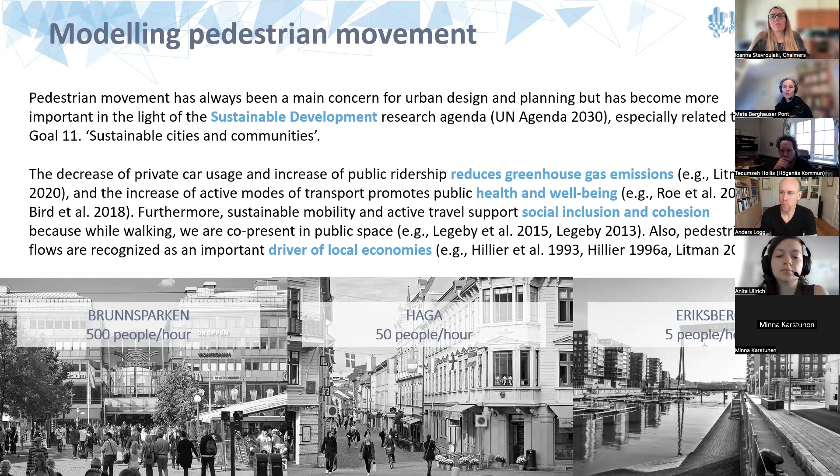So there are many reasons why it is important to not only understand the current situation, where people move and not move, and where you have high intensity of people co-present in the public space and where not, but it's also of high importance to be able to predict new situations. That's what we aim to do. So it's really going from describing to predicting these flows of people in cities.

What we do in this project is to combine two approaches. There is one model that Ioanna and I have been working on a lot, and a lot of other researchers all over the world, which is looking at pedestrian movement from a network perspective, the macroscopic models. On the city scale, you try to understand how the way the network is constituted and laid out affects pedestrian movement. There are also examples looking at pedestrian movement on a much more local scale, with different models, and we will use the social force model that Anita will talk about.

The innovation is not actually these two ways, where we have made a few steps forward in this project, but the combination of these two approaches is the innovation of this Milestone project. So what we aim to do is to predict pedestrian movement on the bigger scale so that we know which streets in the city have more pedestrians than others. Then we use that information to go to the local scale. It becomes an input variable for the local pedestrian predictions.

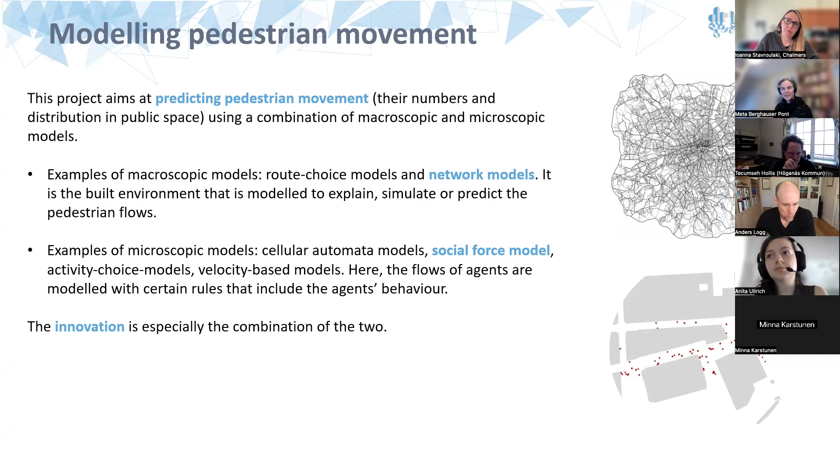Then we go over to a social force model and are able to predict the movement patterns in these local urban spaces. So that's the whole idea. We will present this to you step by step. And I will give the word to Ioanna to start with the city scale network model.

Yes, hello. So like we said, we start from the network model, which is the macroscopic modeling. The aim of that is to predict numbers of pedestrians for every street in a neighborhood or in the city. So how many people walk on each street.

But part of the aim is to do these predictions using spatial properties, spatial predictors that can be easily defined in the urban design and planning phases. And Meta will come back to that, because the point is that this modeling has to be useful to act upon the urban environment, to design, so to forecast pedestrian movement in situations that are planned, that we do not actually have; they're not existing situations necessarily.

And the model we use is a machine learning model, a lasso regression model, indeed to start from a big list of predictor variables, but actually identify the ones that are most strongly associated with the response variable. In our case, it's the pedestrian counts. So what we did is that we trained the model using data gathered in Stockholm, the whole metropolitan area of Stockholm, using different neighborhoods, suburban neighborhoods, urban neighborhoods, and so on. So these were our training data.

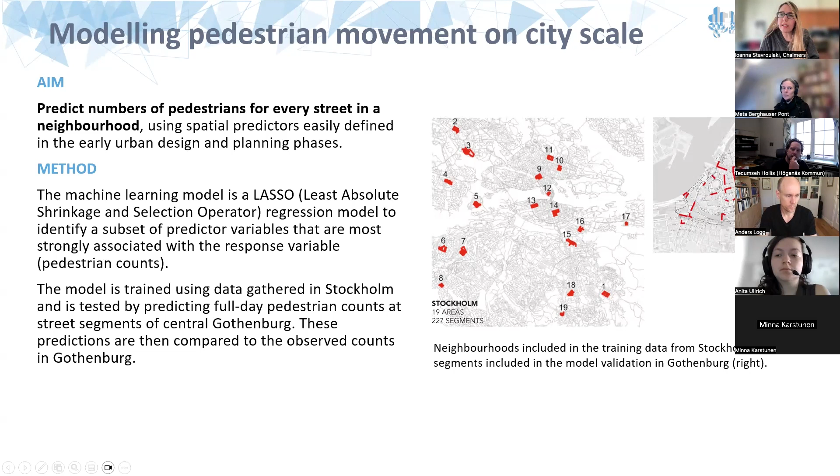And then we tried to predict 78 street segments in Gothenburg center. So that was our test. And we validated the model using real-world data that we had from Gothenburg center. Next slide. Yes, exactly. So here we have the validation data of Gothenburg that were collected from Trafikkontoret in 2018.

And like I said, in our training data, we also had real-world observations from different neighborhoods in the metropolitan area of Stockholm that we gathered in 2017. And the collection method was the same, which is important to have a valid comparison. And it was capturing Wi-Fi signals from mobile phones. And next slide.

Yes, so I will just give you the basic findings, the basic results. So when we predicted, like I said, 78 street segments in central Gothenburg, the performance of the model was around 50% of the response variable. So that means the absolute volume of pedestrians observed, measured in each street, we could predict almost 50% of the response variable, which is a rough estimation, but sufficient for the early stage estimations of pedestrian counts.

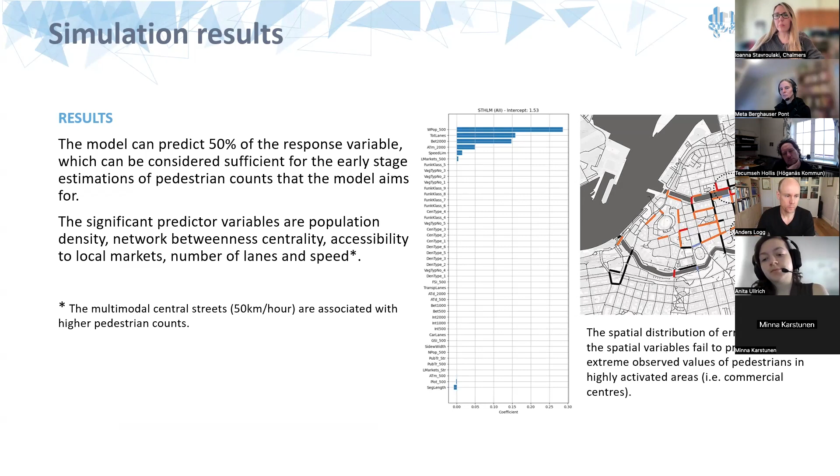And next slide. But apart from the prediction of the absolute numbers of pedestrians, what is specifically important during an urban design and planning phase is if we can predict the relative distribution of pedestrians. So it's not only about how many pedestrians we can predict on each street, but can we predict which streets will have more pedestrians than other streets.

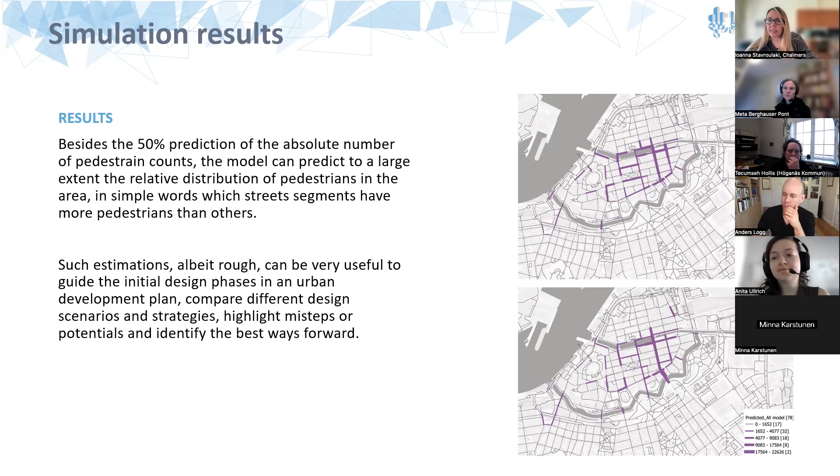This is very useful information in an urban design and planning phase assessment. So such estimations can be very useful to guide these initial design phases in an urban development plan, to compare different design scenarios and strategies, and highlight missteps, potentials, to identify best ways forward, and so on. I will give the word to Anita, and Meta will come back to the usefulness again for urban design and planning. Anita. Yes, thank you.

So we heard about the modeling of pedestrian movement on the city scale, and we from the Fraunhofer-Chalmers Centre were specifically concerned with the modeling of pedestrian movement on the local scale, where we can resolve the individual movement of single pedestrians in the urban environment, as you can also see in the video shown to the right.

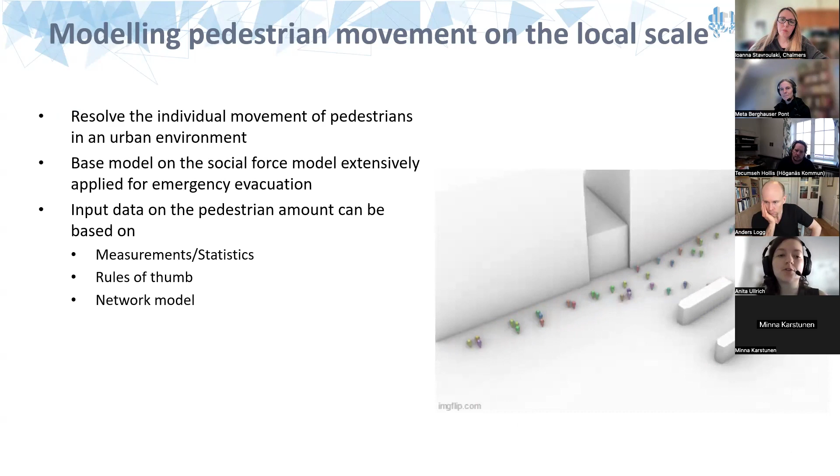And our model is based on the social force model, which is very common for pedestrian modeling with agent-based modeling and extensively applied, for example, for emergency evacuations from buildings. And the input data for the pedestrian amount in these simulations can be based on measurements or statistics or rules of thumb, or in our case of the coupled model, from the data that we retrieve from the network model, like the number of pedestrians that we can expect on each street segment.

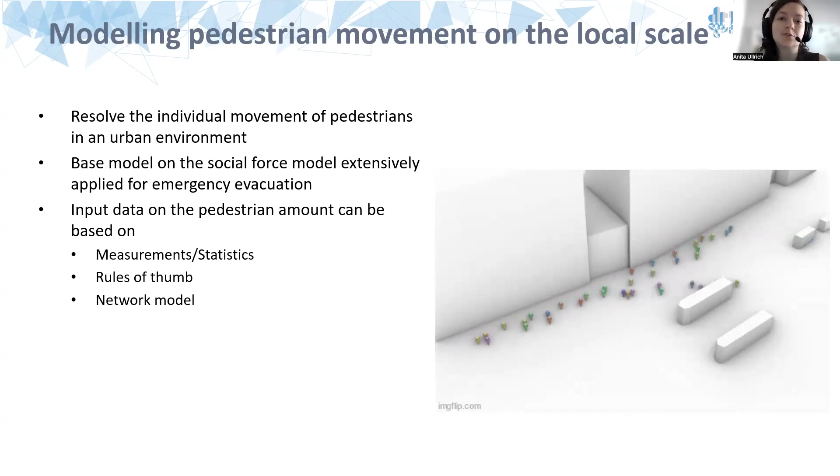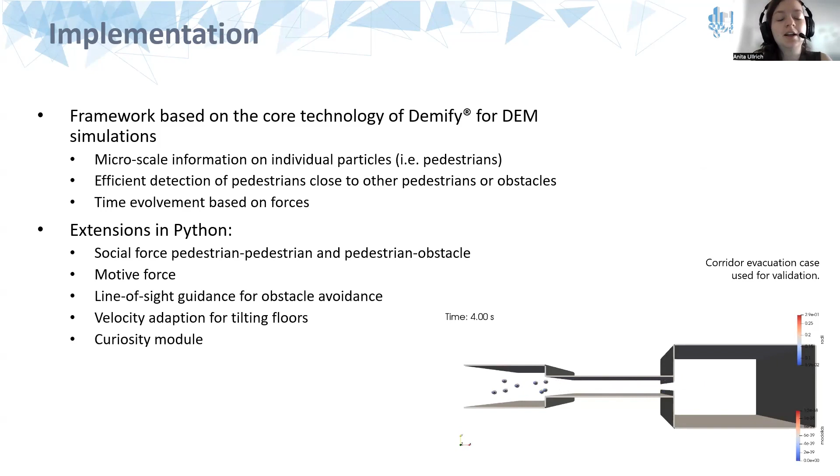So our framework is based on the core technology of Demify, which is a particle simulation software for discrete element method simulations. And here we can simulate the individual particles, which in this case are pedestrians, and have the microscale information available at each time step. And Demify facilitates the efficient detection of pedestrians which are close to each other, and the detection of pedestrians that are close to obstacles in the way or geometries like buildings, benches, statues, trees, and so on. And the time evolution in the solver is based on the forces that are acting on the pedestrians and affecting their movement.

And to implement the social force models, we extended the software Demify with Python extensions. And here we implemented, as I said, a social force model, which is acting between two pedestrians that are close to each other, but also between pedestrians and obstacles to ensure a certain distance between them. Then we have the motive force, which drives the pedestrians towards their desired destination in a simulation, such that they start moving there. And additionally, we included a line of sight guidance, such that the pedestrians can actually see obstacles in their way and adjust their path to avoid running into the obstacles, but going around them.

And additionally, we also added a velocity adaptation for tilting floors, such that pedestrians move slightly faster when they move downhill and a bit slower when they move uphill, for example. And as a behavioral extension, we also added a curiosity module, such that you can define different attraction points, such as shopping windows or store windows, where pedestrians can get attracted to, such that a pedestrian could deviate from their original path, stop and look for a second, and then move on with their original path.

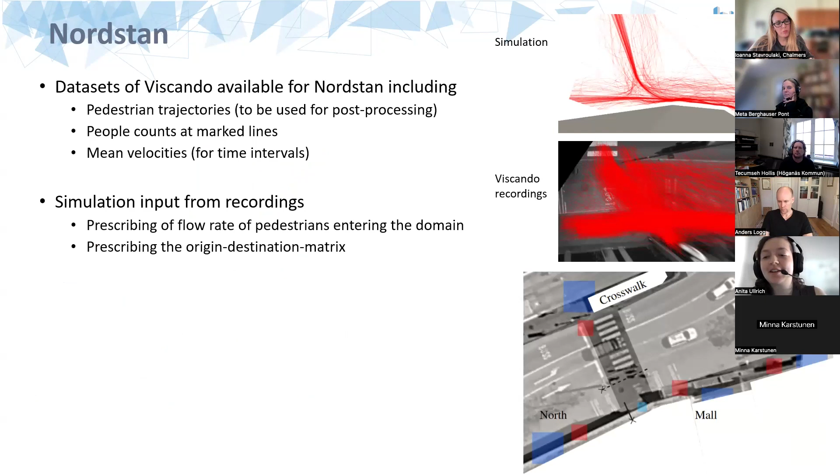And the simulation input from the recordings were the flow rates of the pedestrians entering the domain at the different sections, which were here north, crosswalk, mall, and south, as you can see in the graphic, which we then used to assign each pedestrian their origin and destination based on an origin and destination matrix. And yeah. Oh, sorry. No, I just wanted to say that you can see the trajectory plots compared between the simulation and the measurements here to the upper right. Now we can move on. Thanks.

So now we have the two models in place, the network model on the city scale and the agent-based model on the local scale. And the innovation in this project, as Meta said, is the connection of both in a hybrid model, where we first simulate the aggregated flows of the people moving in the urban area with the network model, and then take this input to simulate the individuals moving in the urban area with the microscale local scale model.

And the input in more detail is the initial distribution of individuals, how many pedestrians we can expect, and the origin destination matrix, meaning the incoming and outgoing individuals at the domain boundaries that we consider. And this facilitates scenario testing, for example, for urban planners, where we can have other input data, such as the velocity distribution, to steer the desired speed of pedestrians that they find comfortable, the attractiveness of points along the path, like shopping windows or statues or a cinema or something else, and the modeling of further individual behavior. Yes, next slide.

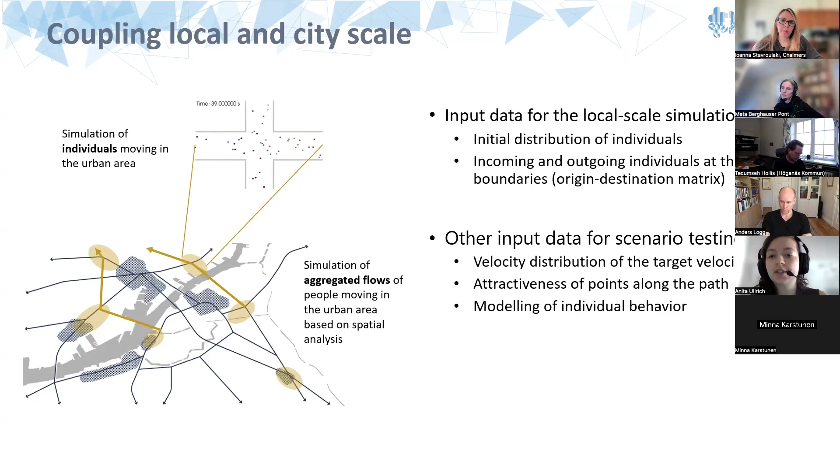And to evaluate the hybrid model, so the connection of both of the models, we considered the case of the Kungstorget region in Gothenburg, where we also had datasets of Viscando available, also including pedestrian trajectories and pedestrian counts, as well as their velocities. And here we utilized the network model to create full day predictions of the pedestrians to be expected on the street segments. And based on this information, we prescribed the flow rate of pedestrians entering the domain and the origin destination matrix in the local scale model.

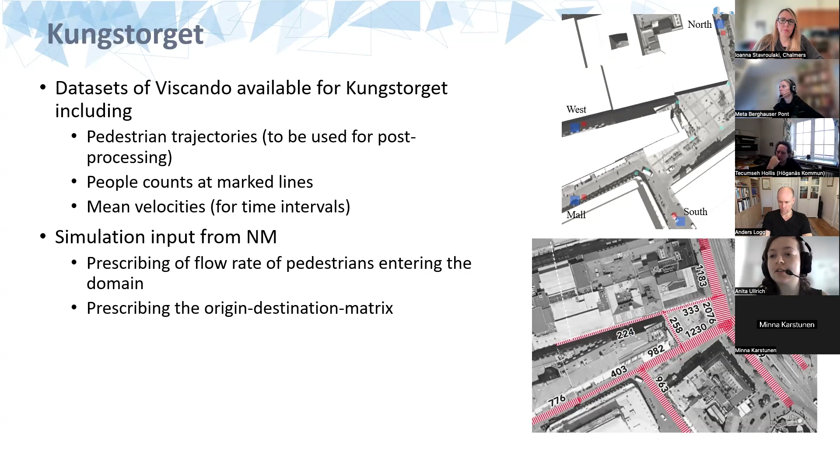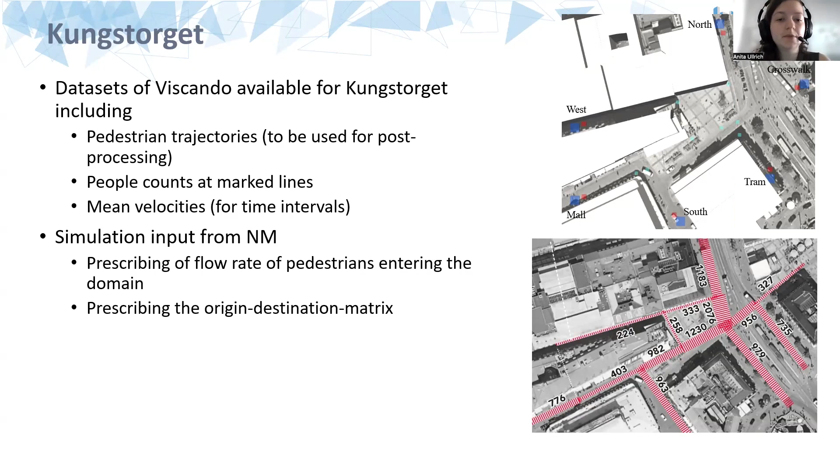And the domains that we chose in this case are seen in the picture above to the right, where we have 6 different sections where pedestrians can enter and leave the domain. Yes, next. So here to the right, you can see a comparison of the results of the hybrid model and the real-world measurements. The simulation results are shown on the left, and the real-world measurements on the right. And in the first row, you can see the trajectories of the pedestrians, and in the second row, a heat map of the pedestrian densities in the area.

And we can see that we capture the main structures of the real-world data. But of course, the real-world data is much more chaotic than the simulation results, but this could be more refined to achieve a similar chaotic behavior of the pedestrians. But we can see that we have similar densities and also similar areas of the domain that are frequently used by pedestrians. So advantages of our hybrid model are that we can actually resolve the local behavior of individual pedestrians, and we can evaluate properties of the pedestrian flow, such as the velocity or personal space. Next slide.

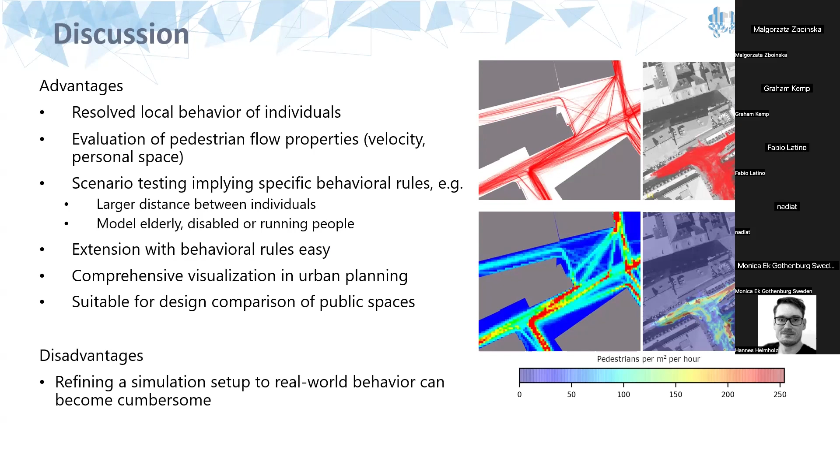Here, for example, you can see a plot of the distance between pedestrians when they are in a conflict, and a conflict means that they are closer than a certain distance. So we are computing the social force between them to ensure that they keep a certain distance. And here we can see how many of those pedestrians that are close to each other actually have a distance of below 1.5 and below 1 meters. And below 1 meter, we would consider already a violation of the personal space.

So we can actually see that with these pedestrian densities, we can see quite some violations of the personal space in the pedestrian movement. But this is also, of course, a definition question, but this can be evaluated by urban planners. And for example, if the layout is redesigned, this could be reduced or increased. For example, how many people are experiencing a violation of personal space.

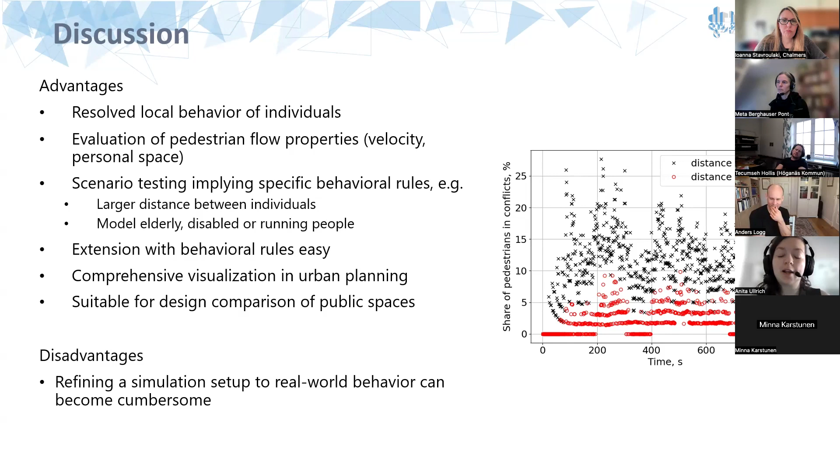So furthermore, we facilitate the scenario testing, which implies that we can test specific behavioral rules, such as a larger distance between individuals that they want to keep up. We could model elderly, disabled, or running people. And the extension with behavioral rules is easy in the Python extension that we implemented. And also we get a comprehensive visualization in urban planning. Next slide, which you can see in this video here, which really improves the dialogue of urban planners, if you can show the pedestrian movement in this way. So it's suitable for the design comparison for public spaces as well.

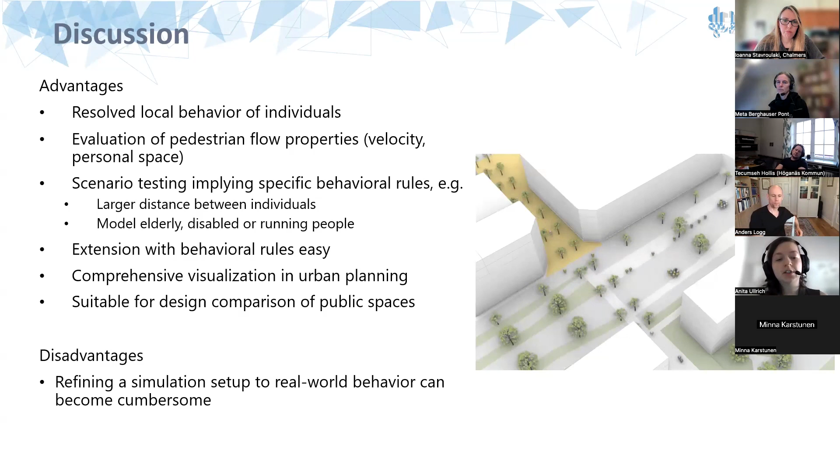However, a disadvantage of this hybrid model is that refining the model setup to real-world behavior, such as this chaotic behavior that we saw in the real-world measurement plots, can become cumbersome because it's quite detailed work and you need to have rules of thumb in place for how the pedestrians should behave. So thank you, and now I'll give the word back to Meta.

Thank you, Anita. So I will wrap up by taking the step also to how this could be used in planning practice. And we have done a few workshops to test this, which Lilje Wall has been leading. And in the first place, we tried to assess how this could be used. And one thing is, of course, to understand the current situation. So we have talked a lot about the prediction of, let's say, new situations, but actually there is a lot to win already by understanding the current situation and to know what you want to change or how you could react on that. And also it could be very useful to validate assumptions that you have. You think certain paths or certain streets are used more frequently, and you could validate that.

But the most crucial thing, what we have referred to a lot, is the comparison of scenarios, so design alternatives in an early stage. And finally, there is, of course, a possibility to assess afterwards whether your design approach, if you would do observations after implementation, see how it affected.

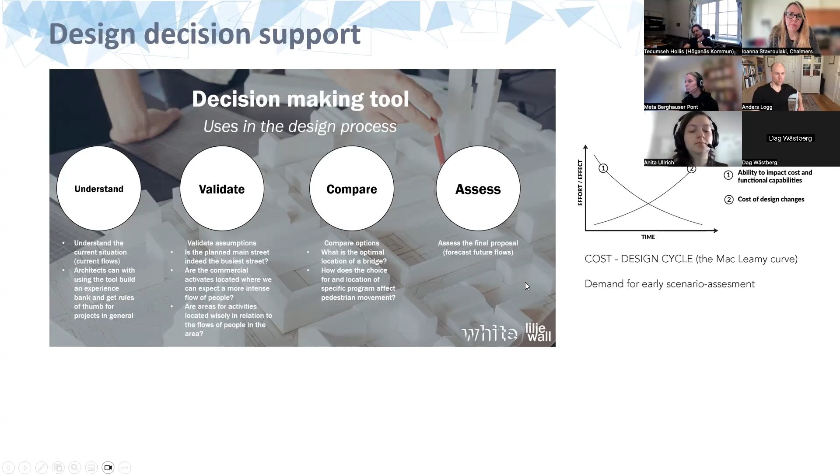And we have looked into a few use cases. How could you actually use this setup, this hybrid model? And I took with me two examples. One is, let's say you have a new design and you are thinking, where should we put the entrances of a new building? First you could react on the flows that you know from the network model, so the model that shows the pedestrian flows on the bigger scale.

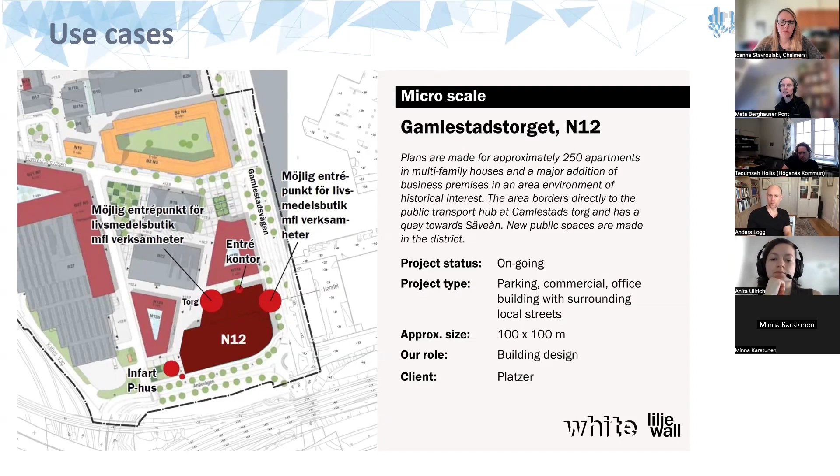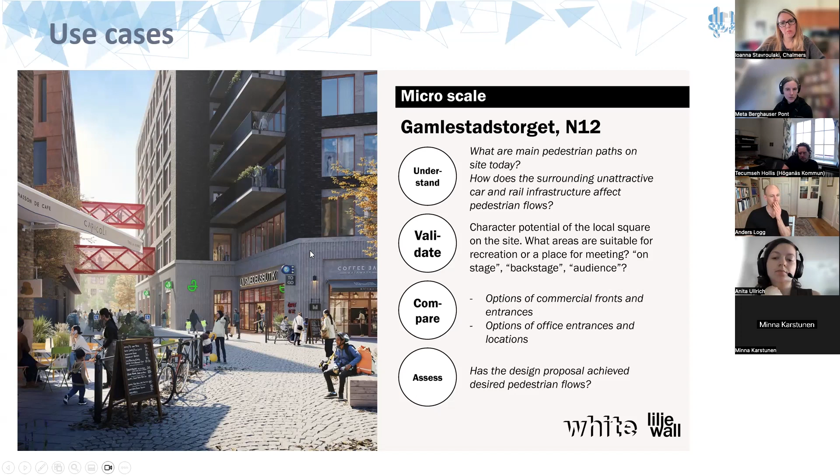But then you can also test with the social force model that Anita has been showing, that if you position the entrances somewhere, then this will also affect pedestrian movement patterns. So actually you can use it in two stages in this case. So that's one very clear example that we looked into, and we describe understanding the situation and doing comparisons, but I will not go into details here, because we will not manage in time.

But the other example is of another kind. It's, for instance, where you have a location and you are thinking about where you will add a new bridge, over the river or over a highway or something. So you are wondering, where should we put it and what would the effects be of that new position of a bridge or tunnel over some kind of barrier.

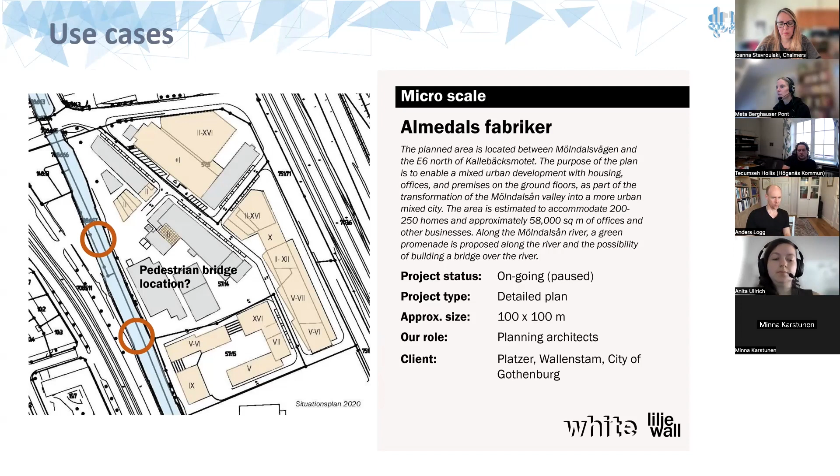And of course, in that case, it is also very useful to have this hybrid model to see both how the larger scale pedestrian flows will change due to this new bridge, and then also look into specific public spaces that will be affected by that in the microscopic model. So these are two examples to showcase how this could be used.

So those are the results in terms of products, besides the models that we have developed, of course, which are also important products. I think that was it. So let's see if there are questions, but thank you for listening. I will stop sharing and see if we have some questions.

Thank you. I have a question, if no one else is before me. Ioanna, you said you got 50% prediction, right?

So are you thinking about other prediction variables that you could include to improve that? Are you missing something that you would like to put into the model? Well, yes, and this is kind of a constant result we have been getting, that when we lean only on spatial variables, there is a kind of a ceiling that we hit. We need to start adding perhaps other types, socioeconomic variables and so on.